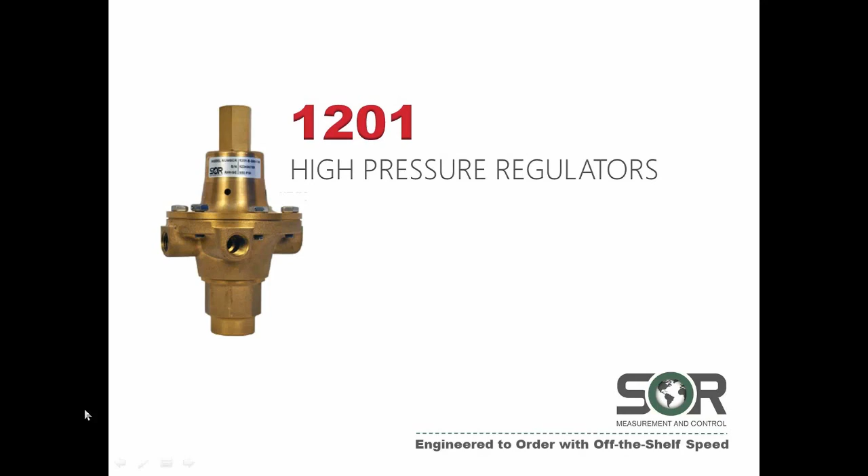So on the agenda for today, I'll be talking about the features and benefits that make the SOR 1201 HP regulator stand out. We'll go over the specifications of the regulator. I'll discuss how the regulator works, its principles of operation, and then we'll talk about a couple applications that we see these regulators used in most often.

We'll also cover some of the competition and then how to order the regulators, what information you might need to know in order to place the order correctly, and then just a couple frequently asked questions that have come up. We'll discuss those questions and the answers.

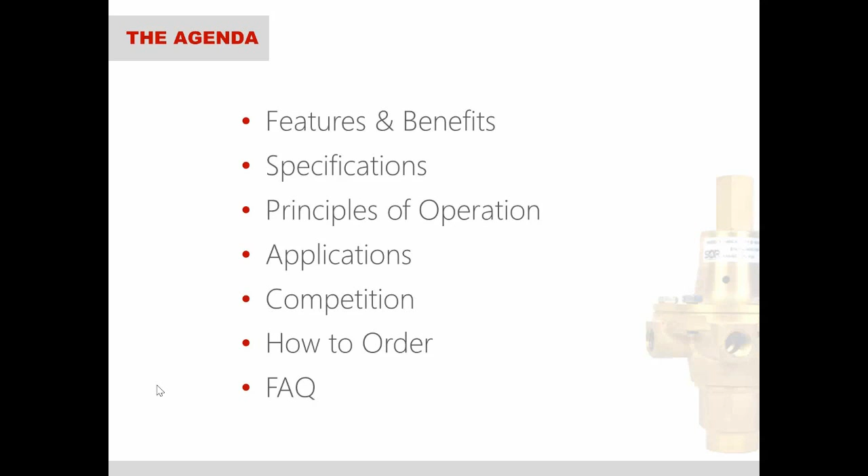So for the features and specifications of the 1201 high pressure regulator, first off, we'll talk about basically what is this regulator. So the high pressure regulator is an extremely durable product. It's designed for those rugged environments with high pressures and high pressure drops as well.

So anything over 2,000 psi or 1,500 psi, generally that's where this regulator would be used. It could be used up to 5,000 psi applications, but anywhere where you're getting those high supply pressures and you want to regulate it down to the 225 psi range and lower, that's really where this product is used.

So the features and benefits. The first one, there's 3 outlet ports on this regulator. Generally what you'll see is a pressure gauge put in one outlet so that you can see what the actual outlet pressure is. This is also used for calibration of the set point. And then you've got 2 other outlets that can control pneumatic devices. You could plug one up and only control one device, or you could use all 3 outlets and control 3 different devices if you wanted to.

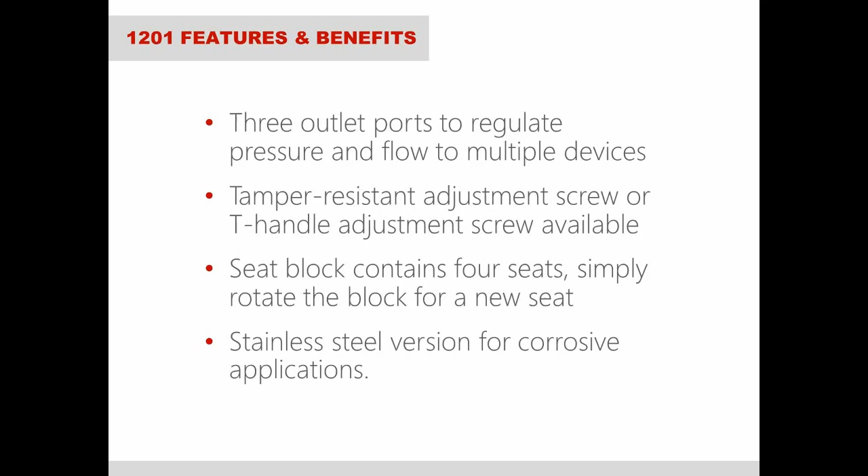And then the fourth feature is a stainless steel version that is used for NACE applications or corrosive environments. This stainless steel version will be coming soon. It is not launched yet, but it is on the way.

So for the basic specifications of the 1201 high pressure regulator, I'll touch on a few of the more important specifications. Your process connection sizes are 1/4 inch NPT connections. One of the biggest differences between the brass and the stainless steel version is going to be the spring case vent. The brass version has 4 holes placed in the spring case vent to allow any gas from a failed diaphragm to escape the regulator.

The stainless steel version, on the other hand, has a tapped exhaust on the spring case vent, which is mostly needed for those NACE applications where regulations require you to vent any gas to a safe location away from the site. So you can use this tapped exhaust to run piping to a verified location.

And so then moving on, we've got 5 different output ranges for the HP regulator. You can go anywhere from 0 to 225 psi all the way down to 0 to 30 psi. So this really just depends on what you're trying to control, what pneumatic device, what its ratings are for its supply pressure. And then also, if you're doing stage regulation where you're regulating down in stages, you might not go all the way down to 0 to 60. You'll go down to 0 to 225 first, and then you'll have another regulator drop it down to 0 to 60.

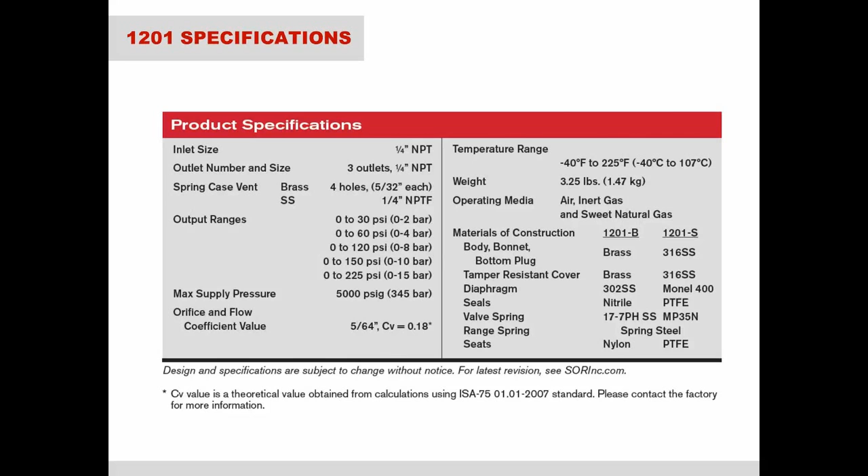And then the materials of construction, really that's the biggest difference between the 1201S and 1201B. So the S is going to have NACE compatible materials while the B isn't NACE compatible but can still be used in natural gas applications.

So now that we've covered the features and the specifications, I'd just like to inform you on how the regulator actually works, how it's regulating the pressure. And so that's what we'll do here. So these regulators are directly operated, and they register the downstream pressure through the body on the underside of the diaphragm. So by direct operation, what this means is that there's really three elements to the regulator.

There's the measuring element, which is the diaphragm. There's the loading element, which is the control spring. And then thirdly, there is the restricting element, which is the seat block and the supply nozzle. So these three elements together are really how the regulator operates, using these three elements with each other.

So another advantage of a direct operated regulator is that it's a lot faster response time as opposed to a pilot operated regulator. So for liquid level controllers and dump valves, response time is vital. And that's why you see this regulator used so often with those other devices, because it's direct operated and it has a quick response time.

So really, how all these three elements that I mentioned before work together is you'll have downstream demand, which affects the output pressure demand on the regulator. So, for example, when the downstream demand decreases, the output pressure will rise. Because they're closing off a valve or something and that pressure is building up and it's increasing the outlet pressure of the regulator. So when this outlet pressure rises, what it does is it pushes up on that diaphragm and pulls up on the seat body.

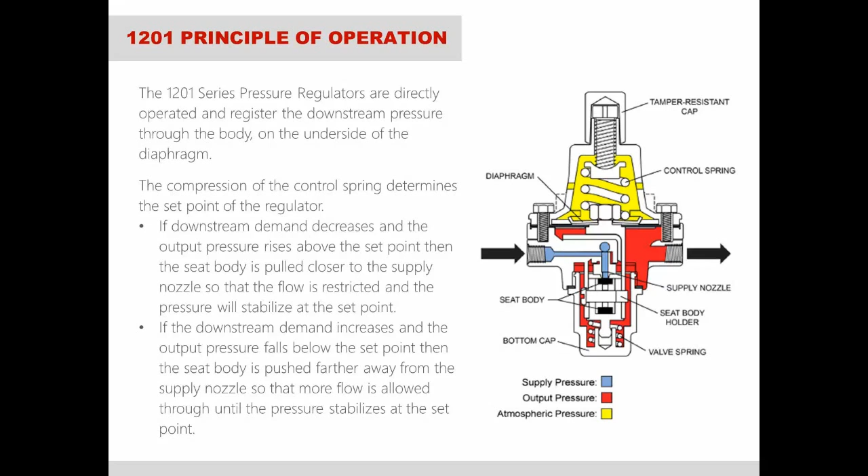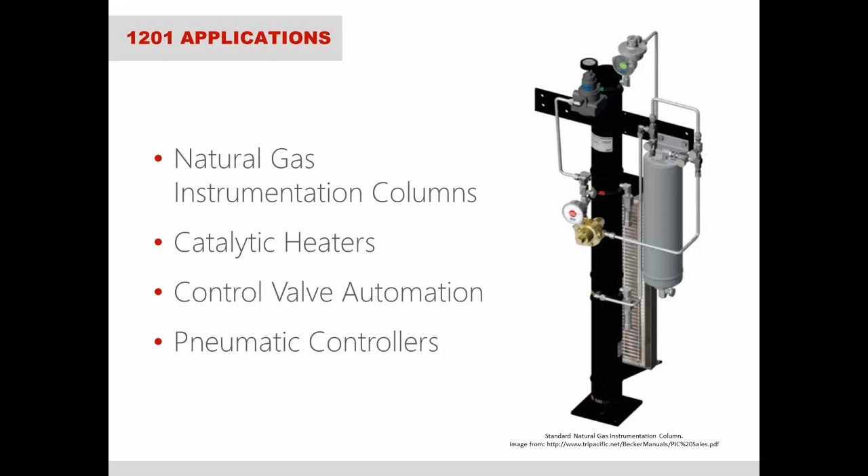The second stage of regulation would be a 1200 series pressure regulator, like a 1227 or 1230, which SOR has not launched yet but is on the way. And then the final stage would be a 1267 air filter regulator, which not only regulates down the pressure to its final output pressure, but it also filters the air or the gas, in this case the natural gas. It filters it so that there's not any sort of gunk or moisture or anything that can build up within the 1400 series dump valve or the liquid level controller.

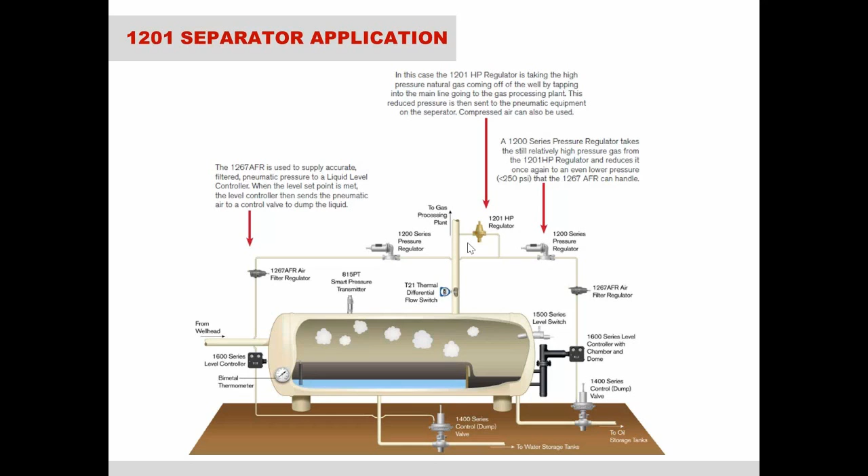So speaking of sales orders, how do you order? What do you need to know in order to order these regulators? Before you can choose the model of the 1201 HP regulator, you'll need to find out the type of media. Like I said, you've got to make sure that this isn't going to be used for liquid media applications. It's only for gas applications.

Second, are there NACE requirements? If there are, you will need to specify the stainless steel version, which can be NACE certified and is corrosion resistant. The third thing to know are tapped exhaust requirements. This goes hand in hand with the second option. If it's NACE required, it's most likely going to require tapped exhaust, which will mean you'll need a stainless steel version. Now, it might not be NACE required, but they might still require tapped exhaust. In that case, you'll still need the stainless steel version because the brass version does not have a tapped exhaust.

Do they prefer the T-handle? If it's preferred, you'll have to order the T-handle as a separate part item. It's listed in the catalog, and we'll ship it with the regulator. Supply pressure: you've got to make sure that supply pressure is within 5,000 psi, within our specs. And then the desired output pressure; this is how you choose the spring and the output range. What pressure do they need it to output to? Pretty self-explanatory. So really that's what you need to know.

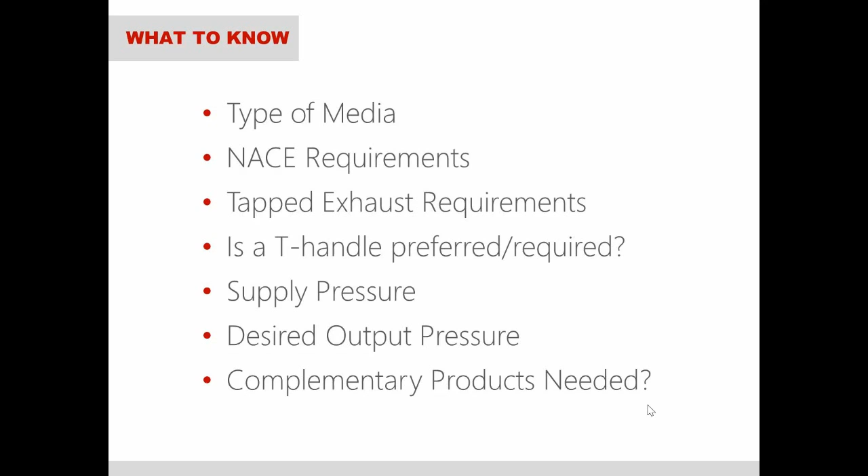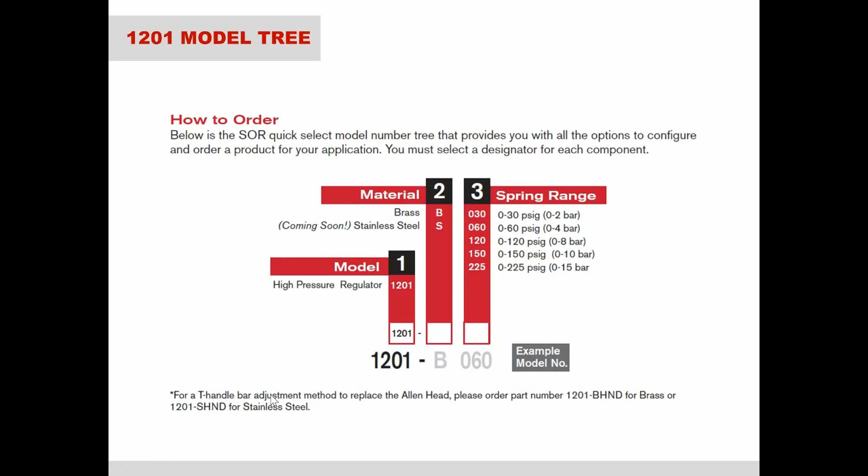Does SOR offer a repair kit for these regulators? Much of the competition does offer a repair kit, and so do we. There's a separate kit for the brass model and a separate kit for the stainless steel model. They're going to include spare diaphragms, seat assemblies, and a couple gaskets and other small parts. For the brass, the repair kit's going to cost $35 list price, and for the stainless steel, the repair kit will cost $54 list price.

So, can I change the outlet pressure range of my 1201 pressure regulator? I think I've mentioned this multiple times throughout the presentation. Yes, any control spring can be swapped out with any other control spring in these regulators. This allows you to easily change the output range of the regulator if you're switching applications or if you're filling an order that requires a different output range.

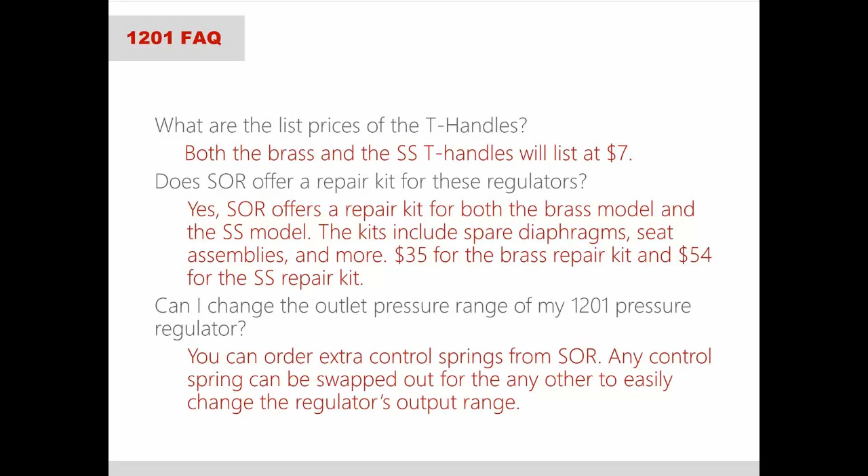So finally, for more information about the 1201 high pressure regulator, please contact the factory. We've also launched a press release on SOR's website. The catalog is online on SOR's website if you'd like to see that. Both of those resources will provide you more information. For any other questions about price or delivery of the SOR 1201 HP regulator, please contact your customer service representative and they'll be happy to help you.

So that's everything that you need to know about the SOR 1201 high pressure regulator. This regulator is being added to our pressure regulator product line, and it's also starting to complete our separator package product line. As I've mentioned, we offer control valves, liquid level controllers, air filter regulators, now high pressure regulators, and we will be adding to that pressure regulator line shortly. Really, we want to be that one-stop solution for all the end users out there who require separator package regulators and products.